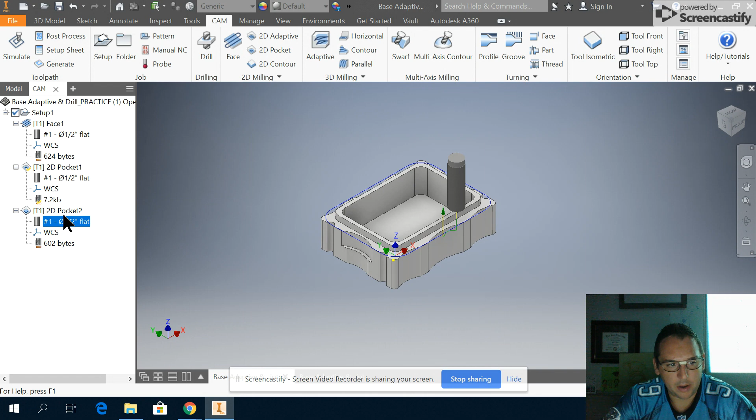So this pocket simulated, and it appears that it's simulating properly. However, it's not. Stock to leave is a default setting that needs to be unchecked. So by right-clicking on that operation, editing that operation, and just going back to your passes, you can see stock to leave needs to be unchecked.

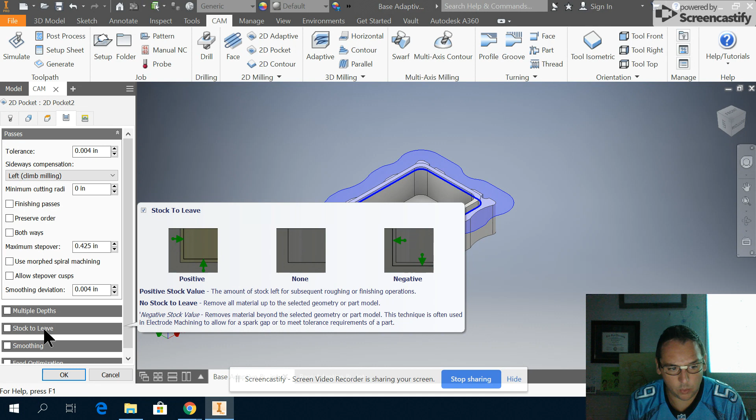If you don't do that, it's going to leave just a little extra material that's going to prevent your stock from being machined at that 0.00275 measurement, which creates that compression fit that we need. Okay, so just make sure every single operation has stock to leave unchecked, or you're going to do a lot of work and find out it's not going to work for you.

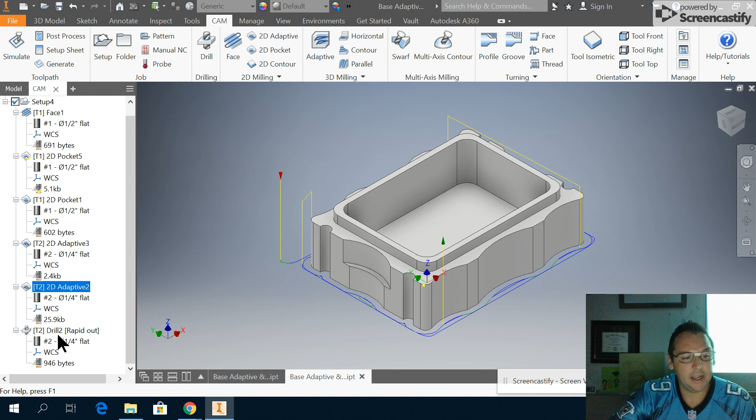Okay, so we just finished this pocket. Now we're going to move on and do an adaptive for these little thumb tabs on each side. We're going to do another adaptive that represents the bottom profile, so it'll cut all the sides. And then we'll do a drill operation to complete this part. So again, adaptive, adaptive, drill. All using a new tool, tool number 2, 1/4 inch flat.

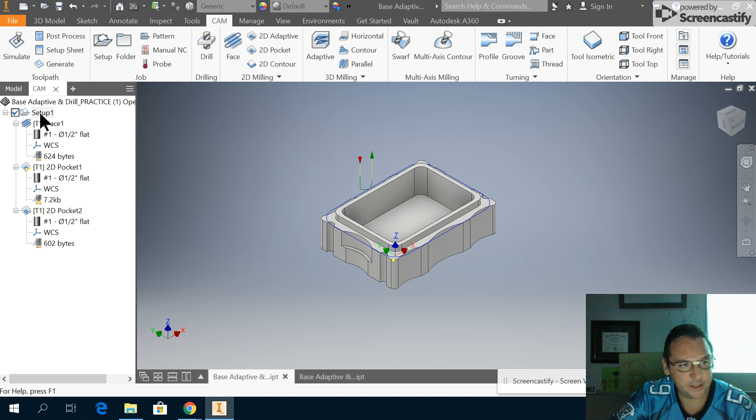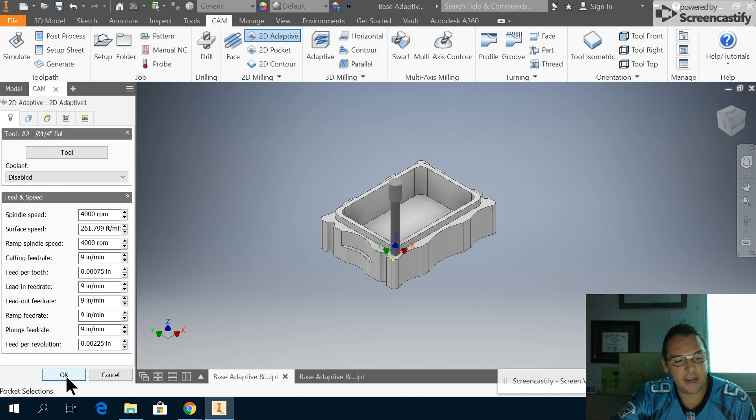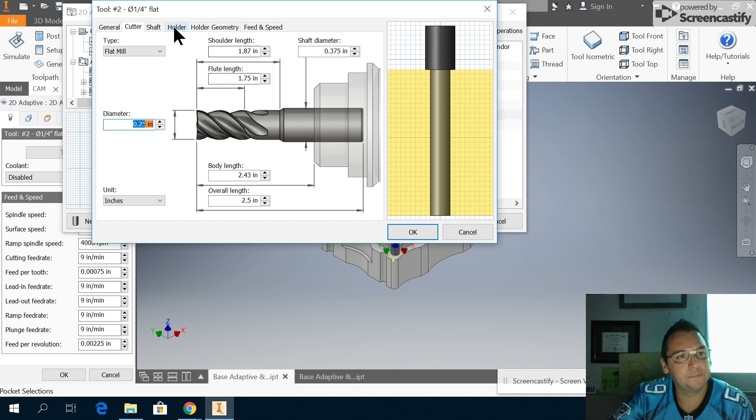Select your setup. Select 2D adaptive. Select your 1/4 inch flat. Again, if you don't see it, it's under type flat under the 1/4 inch settings. And you probably have to go back and make sure that the settings are correct in alignment with the portfolio guide. So I'll go back to tool and edit those settings and just make sure that all these settings that I used a caliper to actually measure on our tooling line up with the portfolio guide.

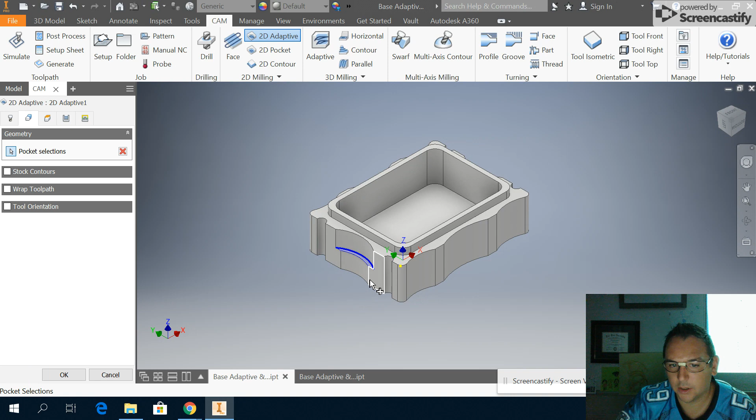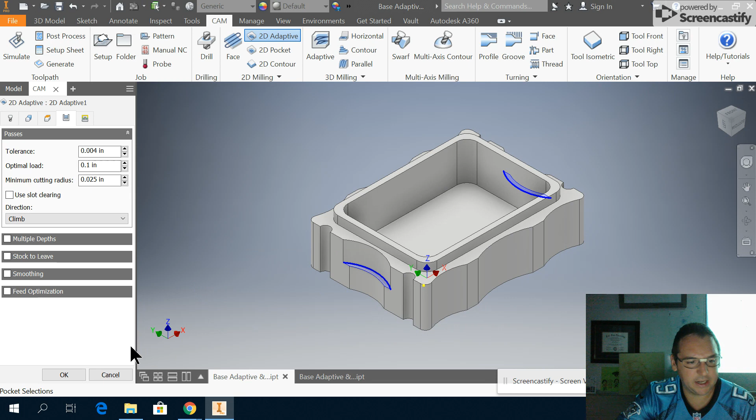So we're using 4,000 RPMs for this one. That's fine. Okay. So here we go. We're going to select that tool, and now we can go in here and select these tabs for your thumb, so you can pull the lid off comfortably, and then rotate the part around to get the other tab selected. Stock to leave is still unchecked. I'm not going to worry about multiple depths, just taking a little piece off there. Select OK. And then again, you can simulate that just to see if it does what you want it to do.

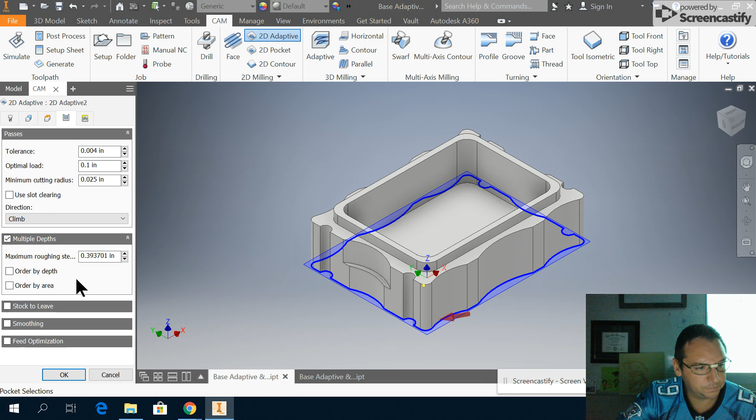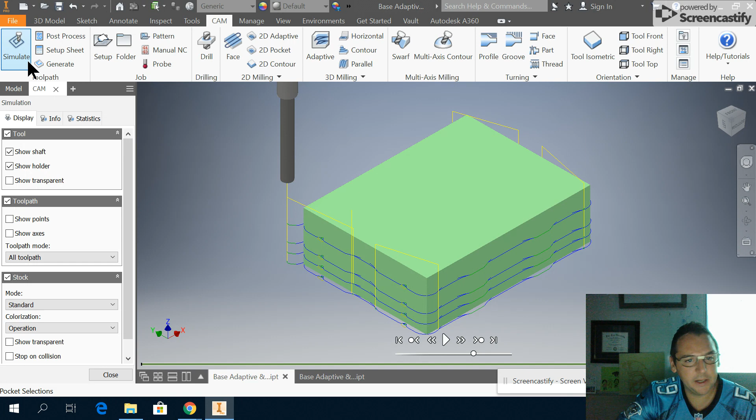And move on. Select Setup again. Select 2D Adaptive. Select the bottom edge, which represents the profile of the part. Check your stock to leave again. We're going to go ahead and do multiple depths on this one. It's recommending multiple depths at 0.393. Let's see what happens with that default setting. Okay, simulate. So it has multiple step downs. 1, 2, 3, 4. Takes a little longer, but again, puts less stress on the tool and provides you the cut that you want. So we're going to go with that.

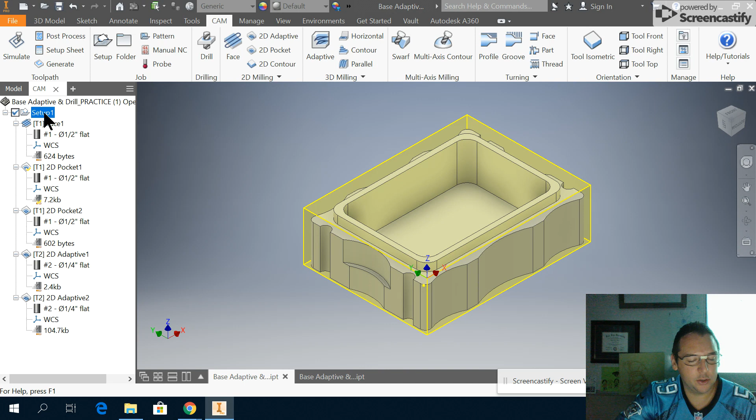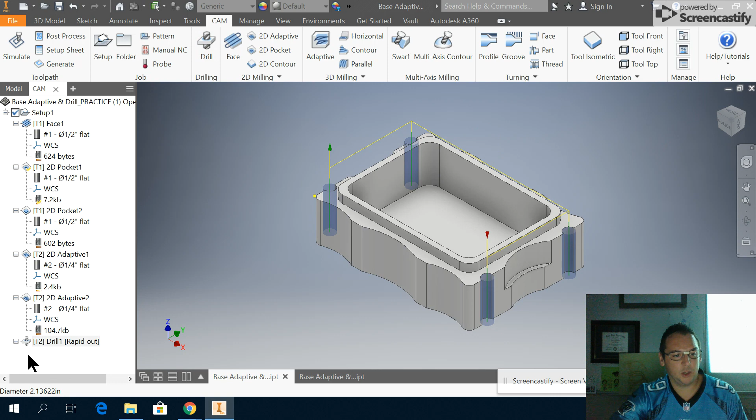And last is the drill operation. And we're going to use the same tool, tool 2. And we're going to select each hole. Check our, no stock to leave on that setting. So generate that. Okay. And you can simulate that drill operation separately. So it turns red. If you can see, it turns red right there. It's a potential crash. Now, I know it's not going to crash, so you can disregard that. But sometimes there really is a crash and you need to look into it.

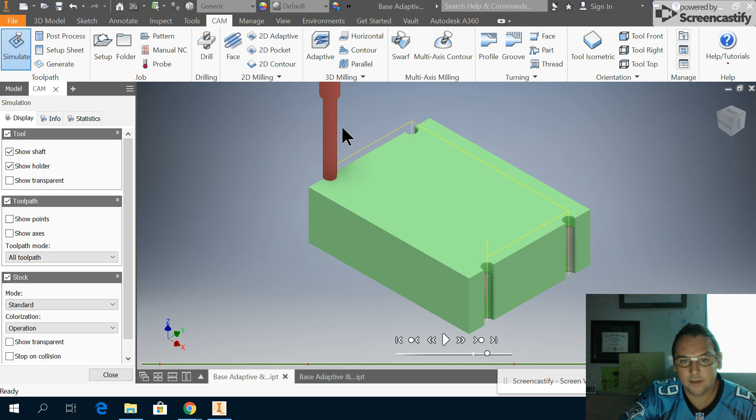So if you see that's happening and you're not 100% sure it's not a crash, you can call your teacher over to evaluate that before you generate all this into a post process, a file that you take over to the machine, verify it on CNC motion for Intelitek, and then take it to the machine and run it. You want to make sure that these crashes can be avoided. So finally, you can select your entire setup, do an entire simulation, and go through that entire process, and just again evaluate to make sure it's doing what it should be doing, and there's no crashes.

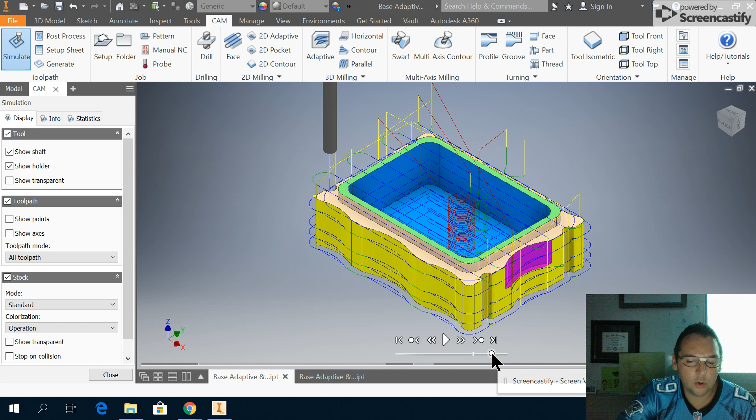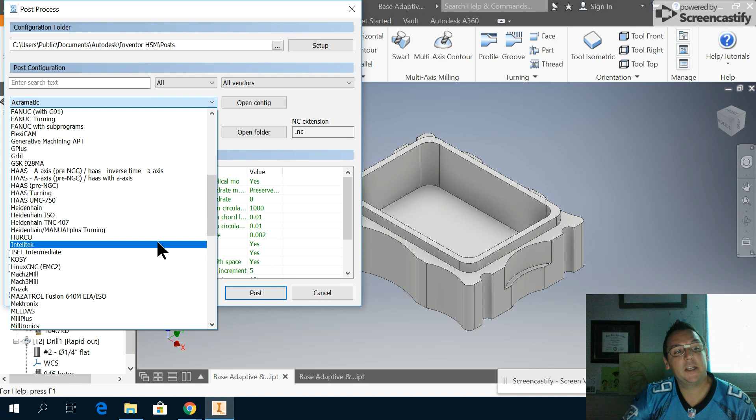Once you're confident with the process, select your setup, select post process. You're going to select an output folder, which is your flash drive. So you need to find it on the PC and select it. You need to make sure your post configuration file right here is the Intelitek operation. So it should be under PLTW. Or here's Intelitek. I'm not seeing the PLTW option, so we're going to go ahead and just choose the Intelitek. But if you do have a PLTW option, you need to choose PLTW Intelitek. If not, just go ahead and choose Intelitek. If you're in advanced manufacturing class and using a different machine like Haas, then you need to select the machine you're working with.

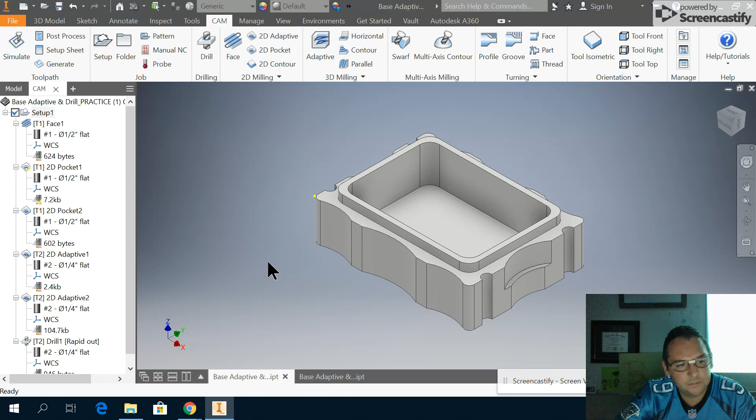Then you can name it the program name or number. So I'll just name mine base, and then post that file. Save that file. Make sure it's saved in your flash drive. And then you can evaluate all your code right here. You can actually do some editing and modification here, replacing certain things out. But at this point, you're ready to take this file, open it up in your simulator for your machine, and test the simulation process. So for us in PLTW CIM, we're going to use the CNC motion simulator on your computers to simulate that process, just like in your initials project.